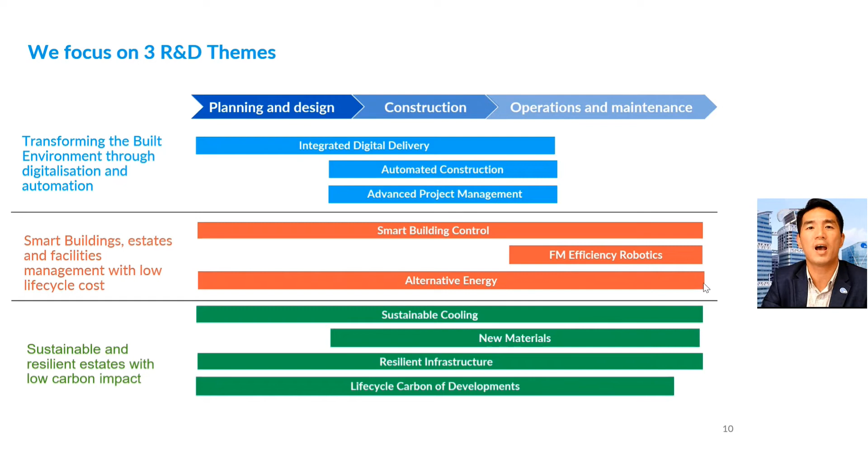Over the years, even before the setting up of our dedicated R&D unit called the Future of Building and Infrastructure, or FBI in short, we have been embarking on R&D at JTC. So here is a video of some of the highlights of our R&D efforts. Sit back, relax, and enjoy the video.

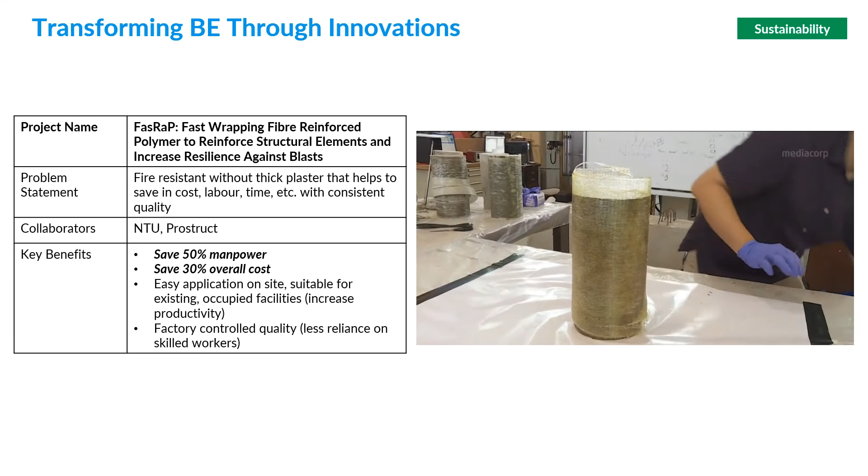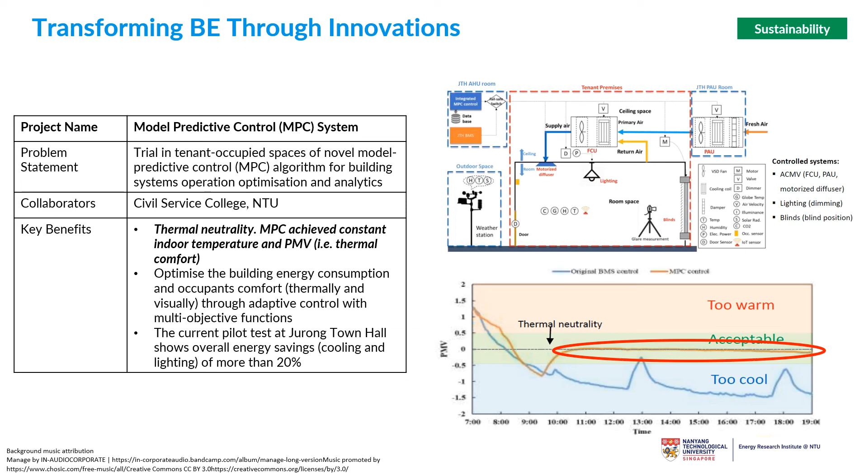So I hope you have enjoyed the video. We showcased some of our R&D achievements. We have more R&D results which are not shown here. So if you are interested in any of our R&D solutions, do contact us and we'll be happy to share more with you.

In conclusion, JTC sees innovation as our key focus towards achieving environmental sustainability and industry transformation. We have focused our R&D along three themes: digitalization, productivity and automation, and sustainability and resilience. JTC takes a collaborative and consortium approach to bring in industry partners at an early stage so as to ensure that our solutions are viable and feasible. Through emerging technologies and collaborations, JTC hopes to champion the BE sector towards a more sustainable and resilient future.